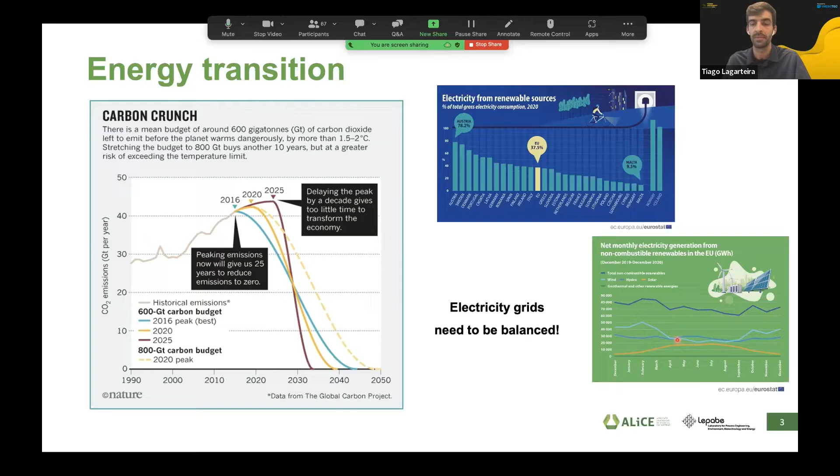To provide a stable electricity grid or to stabilize it, we need different storage solutions, not only in terms of response time, but also in terms of power and energy density. So this is a little bit of what I wanted to introduce here.

In terms of electrochemical energy storage, we have different types of solutions, from capacitors to supercapacitors, batteries, and fuel cells, which I'd say is more hydrogen. These different technologies have different specific power and specific energy. Energy is more related to capacity, while power is responsible for how much energy we can deliver per unit of time.

We can see that capacitors have very high specific power, and hydrogen has the lowest in this case. But in terms of capacity, hydrogen has the highest value, followed by batteries, supercapacitors, and then capacitors.

Also important, depending on the application we need these storage systems for, is the notion of energy density and power density, related to gravimetry—per unit of mass—and in this case per unit of volume. This is quite relevant mostly in mobile applications and transportation, because the space needed for these systems is much more limited. So we need to provide compact systems with relevant energy density and power density.

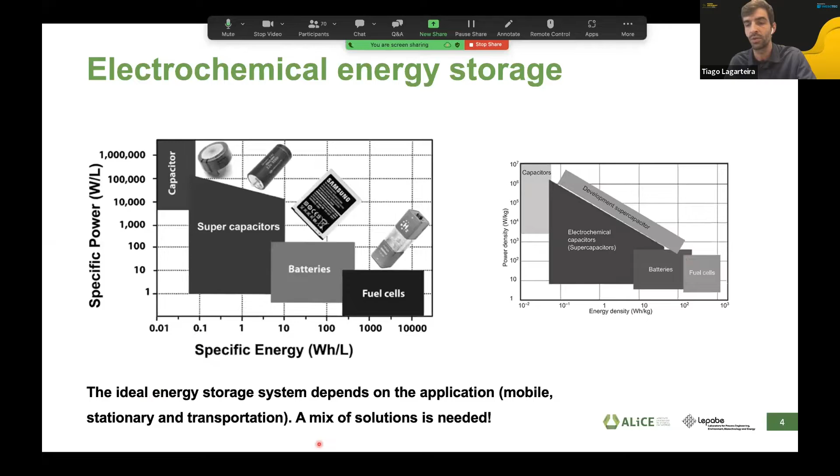From a gravimetric point of view, hydrogen has the highest capacity, followed by batteries. But in terms of power density, hydrogen has the lowest compared to capacitors, supercapacitors, and batteries. The main outcome of this chart is that the ideal energy storage system depends mainly on the application, and since different applications have different needs, a mix of solutions is needed. This is not about competing between electrochemical energy storage systems, but competing against the use of fossil fuels. So we will definitely need a mix of solutions that will be more advantageous depending on the application.

So now specifying a little bit the energy storage systems related to batteries. In this case, we have again a relationship between energy density and also specific energy, so capacity. And I would like to present you here the all vanadium flow batteries, in this case with very low energy density and also capacity. And we have here lithium ion.

So lithium ion is the most known battery technology that is being used mainly in mobile applications, but also in lightweight vehicles. But we also have some interesting batteries, some based on lithium and some other ones, redox flow batteries, that are a much more disruptive approach but less mature, at lower TRL, but that will deliver higher capacities and also higher power densities when compared to lithium ion.

So just for your reference, gasoline stays here. So this is a little bit our reference in terms of needs, or what we need to deliver with a completely different propulsion system.

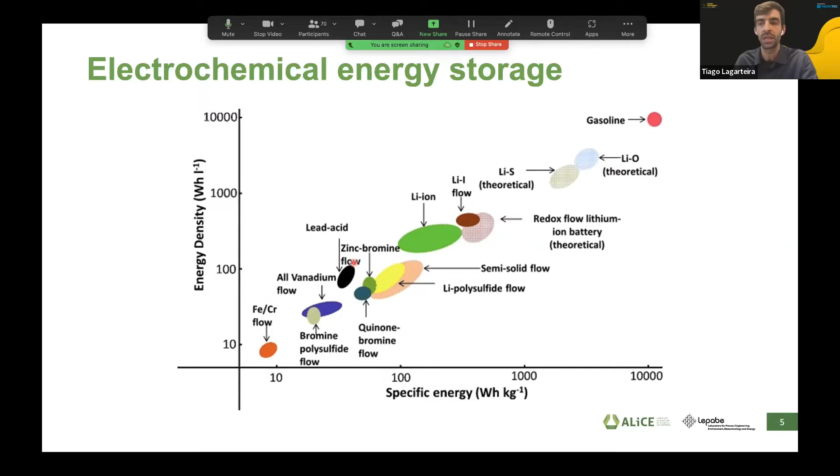So regarding redox flow batteries, redox flow batteries are a technology that is already in the literature since the 50s. They experienced a very slow pace of development. NASA was the first one developing these at the small stack level, but then most of the work was done by the group of Skyllas-Kazacos.

Skyllas-Kazacos is a professor. She is based in Australia. She is not so active today anymore, but her group were the main pusher on vanadium redox flow batteries.

Then in 2011, considering the awareness of the population towards electrification and decarbonization, the research interest on redox flow batteries started increasing. And today we have 9 different types of redox flow batteries that are already in the market. Okay, not very large scales, but they are already, and you can already see them on the market.

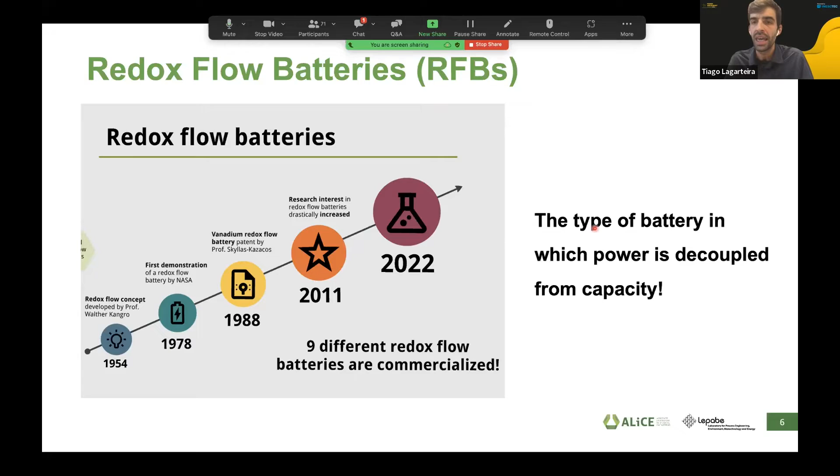However, why are redox flow batteries so interesting? Regardless of the low densities in terms of capacity and also power, in this battery the power is decoupled from capacity. So here you have a small sketch of a single cell of a redox flow battery.

And you can see here that the energy, unlike lithium-ion batteries, is not confined to a solid-state electrode in this case, but the energy is instead in an electrolyte. We call it an electrolyte. So what happens here is that we have the hardware, so the components of the cell, end plates, porous transport layers, and also a membrane that electrically insulates both electrodes and only allows the passage of ions.

But the energy itself, electricity, is stored in liquid electrolytes that we can flow inside the battery and that we can charge or discharge it depending on the operation mode by using very simple devices like pumps. Here we have a sketch of the components.

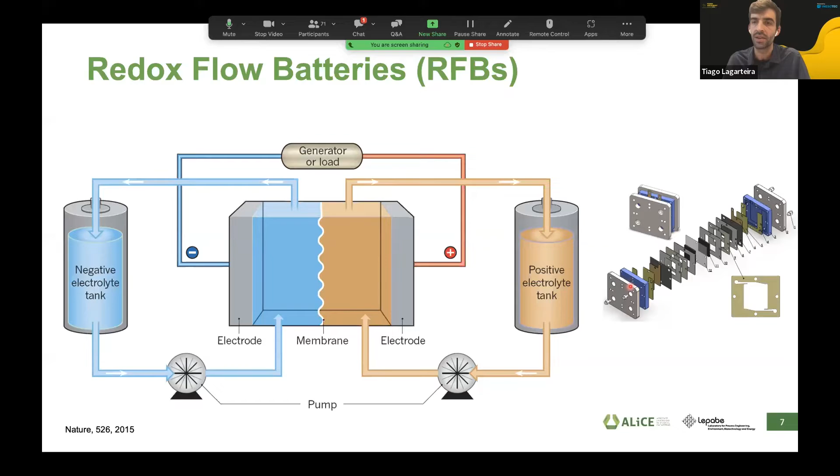This is, okay, the membrane inside. All the other components are gaskets to avoid leakages. And we have here these black ones. These are where the charge transfer takes place. So these are the electrodes, typically carbon felts. Then we have current collectors, graphite plates, to be able to circulate the flow and to have a more homogeneous distribution, and also the end plates where we tight the screws to provide compression.

Of course, in an industrial device, what you have is a stack of these cells, so we can stack them in series connection. And yes, so most of the components are very similar to what you see in single cell. We have the positive electrolyte working on the positive, circulating in the positive sides. We have ion exchange membranes, bipolar plates, and of course the end plates.

And what we have when we have a discharge cell is that we have an OCV of 1.25 volts. So of course, to be able to charge it, we need to provide electric power. When we are in discharge mode, the system realizes work for us, so we are able to transform chemical energy again into electricity.

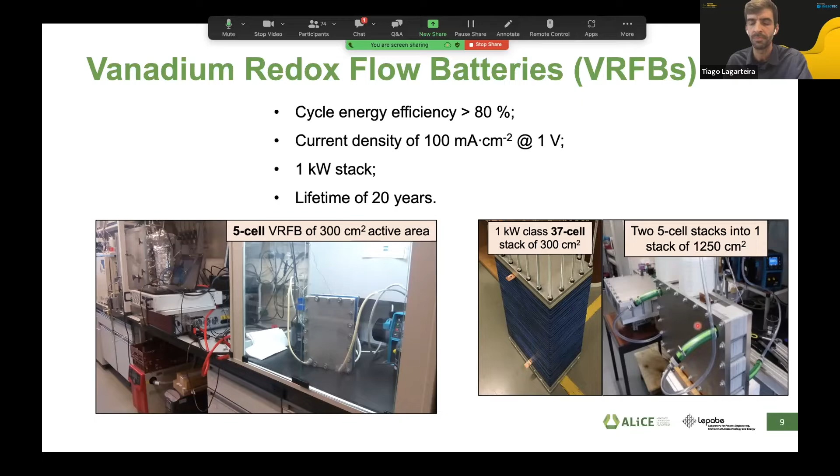This was a national project together with EFACEC that ended just before the pandemic, by the end of 2019. Now some of the advantages of these batteries.

They are very cheap to construct, with low levelized cost of energy. They can enable high current densities, very high round trip efficiencies, and they are very stable. Additionally, because we use aqueous-based electrolytes, they are safe and reliable.

However, they raise some environmental concerns. Sulfuric acid and vanadium aqueous solutions pose environmental concerns. Also, the low solubility of vanadium at higher temperatures is a problem because it decreases the power density of the system, and vanadium in general has a high price.

Vanadium is a critical material, but it is dissolved in very small concentrations in the sea, meaning very high OPEX to obtain it. That's why the cost of vanadium per kilowatt hour is excessive for the target set by the European Union for electricity storage. They also have a low energy density, around 25 watt-hours per liter.

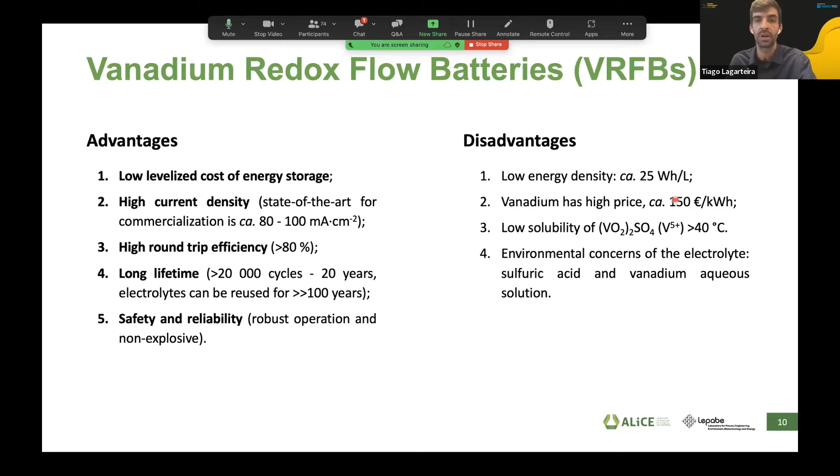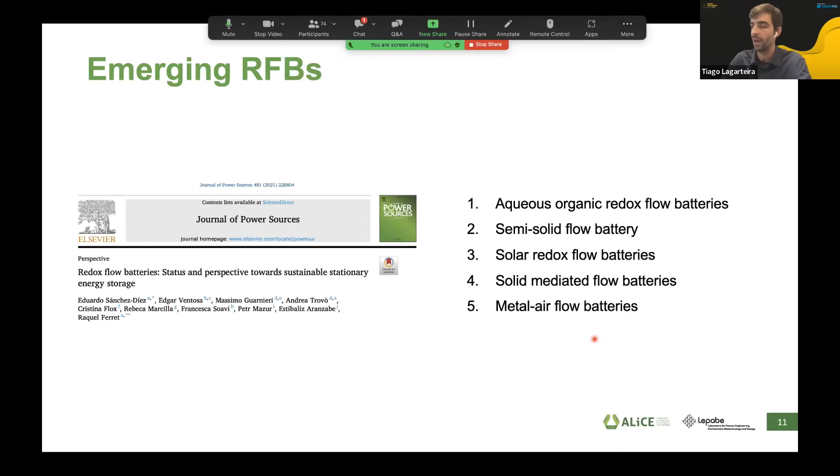I will mention some other emerging redox flow battery technologies: aqueous organic redox flow batteries, semi-solid flow batteries, solar redox flow batteries, solid mediated flow batteries, and metal air. I won't go into all of them, only the ones we are currently working on and that we think have more potential.

Aqueous organic redox flow batteries are quite interesting because as redox pairs we use organic molecules, which are very inexpensive to synthesize using very abundant materials. So they have very high potential in terms of cost for the system. The round trip efficiency gets closer to 85%, with also relevant current densities.

But our interest within our group is related to solar redox flow batteries. These are a hot topic right now because we can include in one device the capture of sunlight to produce electricity, and in the same device we are able to produce solar fuels without the need for independent photovoltaic panels to power electrochemical systems.

We can integrate these into one device, and also do very interesting thermal management because we can take advantage of the heat from radiation, not only to heat up the system, but also to integrate it with, for example, residential applications such as heating water. However, these solar redox flow cells are not commercialized yet.

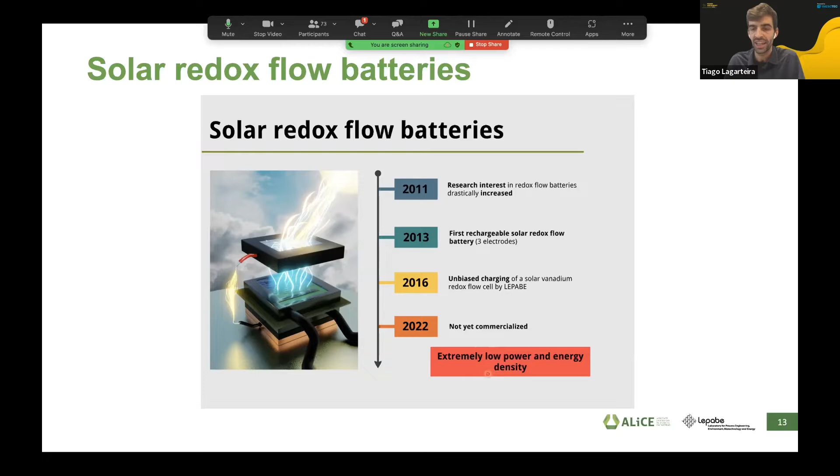They have extremely low power and energy densities right now. However, our group was one of the main groups in Europe that brought the spark back to this technology. The first work on this was done in the 70s, but together with Aarhus University in Denmark, we filed a patent on this concept in 2015, because we noticed some very innovative redox pairs were emerging, along with higher performance photoelectrodes that would be able to ramp up this type of technology again.

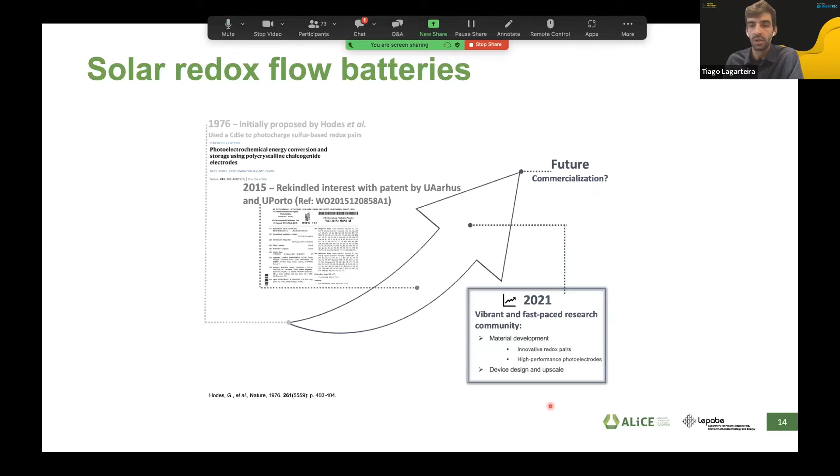In our group, we are mainly working on the device designs and trying to upscale these to relevant scales, aiming for a solution that can penetrate the market and present the theoretical advantages we see. So just a short scheme about this type of system.

We have a photoelectrode here, in this case a photoanode, where we have charge generation. Then we use a redox mediator to collect the charge and deliver it into our electric load, and also to produce ions that are exchanged through the ion conducting phase, to be combined with the redox species in the other electrode.

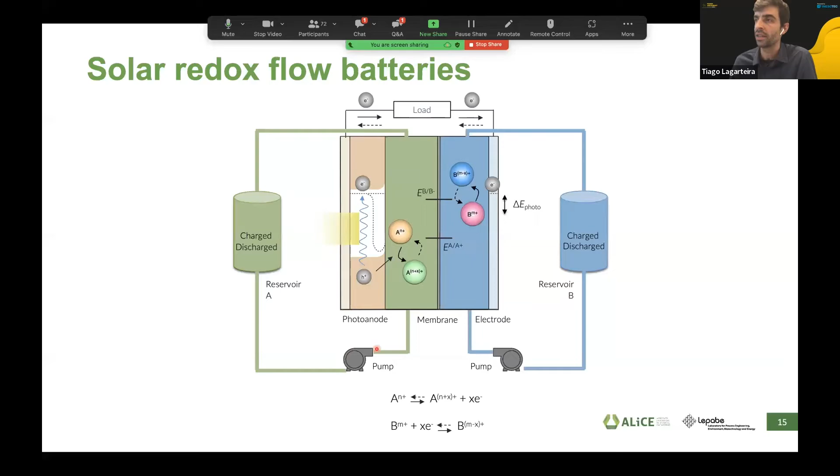We have also been working on photocathodes. However, photoanodes, considering the electrode potentials, are more interesting in terms of performance right now. So this is a little bit of what we have been doing in our group.

From 2015, there was no continuous operation of this type of system, and the active area was also very, very small. So we carried out a project together with a university in Denmark, where we constructed devices able to have continuous operation. Active area was still an issue, and this is currently our focus - to upscale the active area from a couple of square centimeters to 25, and hopefully larger areas in the future, so we can reach scales that are industrially relevant.

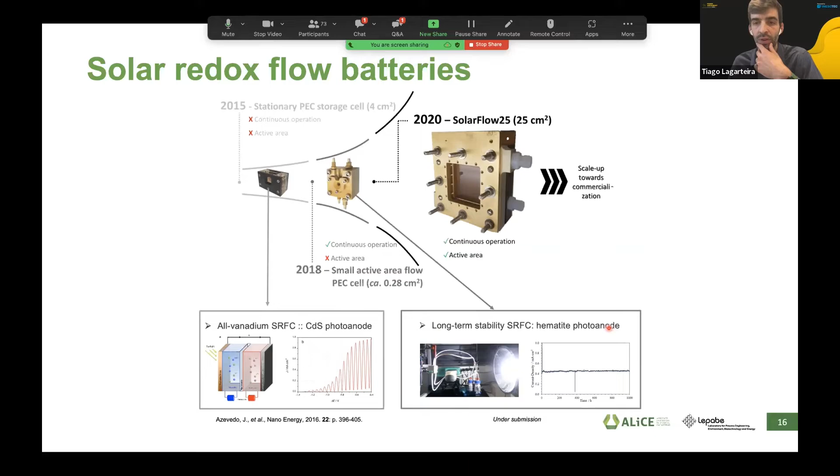We have also published some very important works in the literature - the first all-vanadium solar redox flow cell with a cadmium sulfide photoanode, and now we are working on a hematite photoanode, which shows very stable performance.

But also, as an alternative, not talking again about solar redox flow cells - these are a very hot topic right now - in our group we have a close collaboration with a company based in Munich on POM redox flow cells. These are very similar to the vanadium ones, but instead of storing energy in vanadium ions, we store it in POMs.

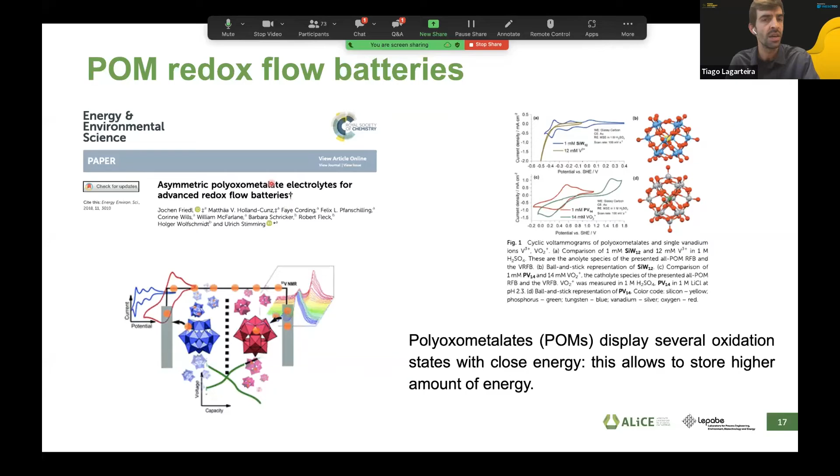POMs are a molecule, a metal complex called polyoxometalates, that display several oxidation states. This means that per molecule we can exchange, in some cases, up to 32 electrons. So we can store much more energy in these redox species compared to vanadium, which dramatically increases the energy density and also the power density, because electron transfer with these redox species is very, very fast.

Another type, more conceptual because different variants are already being studied, is the metal-air flow battery. Metal-air means we have an electrode that is metal, but the other side of the battery is much more like a fuel cell. So we can, for example, using vanadium, aluminum, nickel, or also these POMs, use these POMs on one side of the battery.

On the other side - for example, for transport applications this is very relevant - we can process oxygen from air and discharge the electrolyte inside this battery. Then, due to the decoupling of power and capacity - this is why redox flow batteries are so interesting - we can go to the station and just switch discharged electrolyte for charged electrolyte, in a reverse reaction, also on the air side.

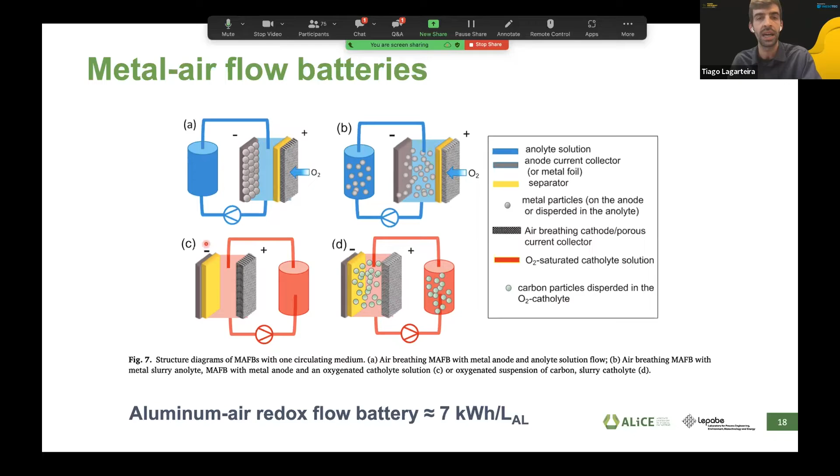And now I will briefly mention what we are doing on hydrogen. Hydrogen, for a lot of people, companies, and institutions, is considered the fuel of the future, and hydrogen is already being used today as a utility, mainly in petrochemistry, ammonia production, and steel. But hydrogen is also seen as a very promising energy vector.

Hydrogen systems are much less efficient than batteries on average, if we talk about electricity-to-chemicals and back-to-electricity conversion. But hydrogen is much more flexible than, for example, lithium-ion batteries, because storing electricity in batteries is very promising in modern electrical grids and modern countries.

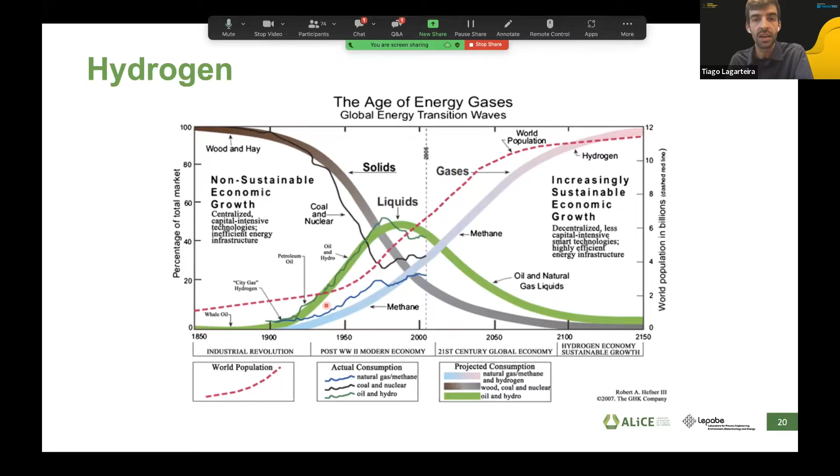But if we talk about electrifying or decarbonizing countries like China, India, or mainly in Africa and South America, the electricity grids cannot be so easily balanced with batteries. So in this case, hydrogen is a commodity that can be easily transported over very long distances, and despite the low efficiency, its flexibility is a critical advantage, and it can replace natural gas in the future, which is a commodity currently being commercialized on a global scale.

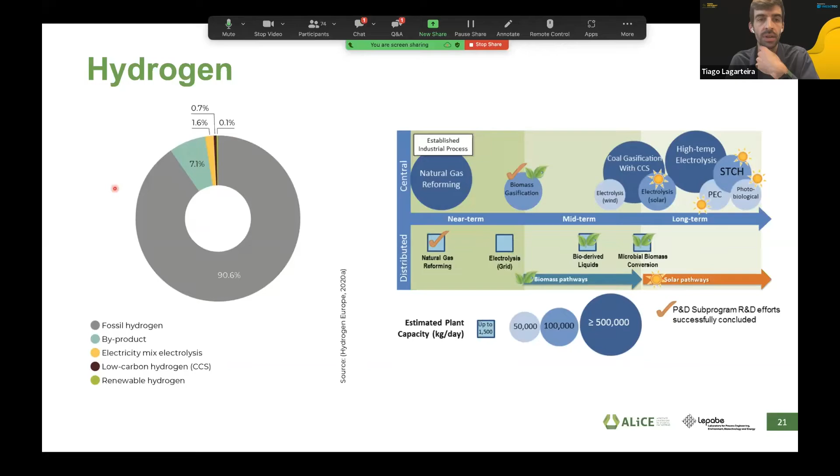So most of the hydrogen production today is based on the reforming of fossil fuels. In the future, we expect that water electrolysis will take a major share of hydrogen production, so the so-called green hydrogen. And within this green hydrogen, we have different technologies to be able to produce it.

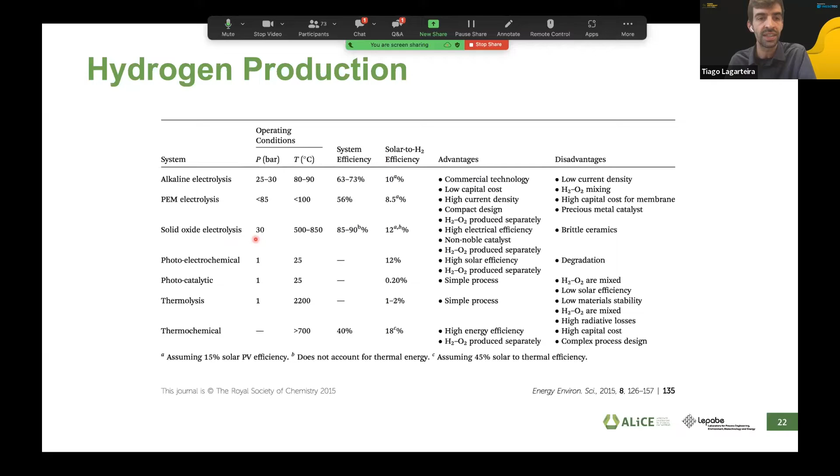So we have alkaline electrolyzers, proton exchange membrane electrolyzers at low temperature. These are the more mature technologies, but we also have electrolyzers that operate at higher temperatures, in which the thermal integration is very interesting because we can use less electricity to produce the same amount of hydrogen. However, I will skip this.

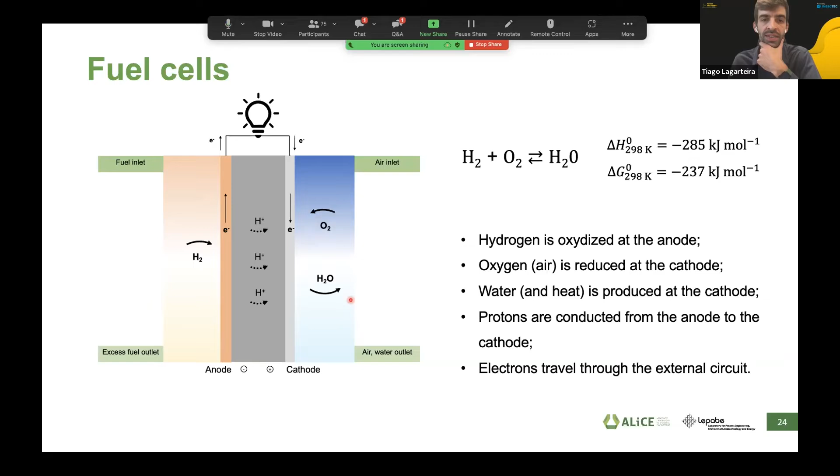A fuel cell, I think most of you know, is a galvanic device where we have our fuel, hydrogen, and we oxidize hydrogen, we produce protons, and the electrons flow through an external circuit and are able to produce electricity. In the cathode side, we process oxygen, and the only product is water and some heat.

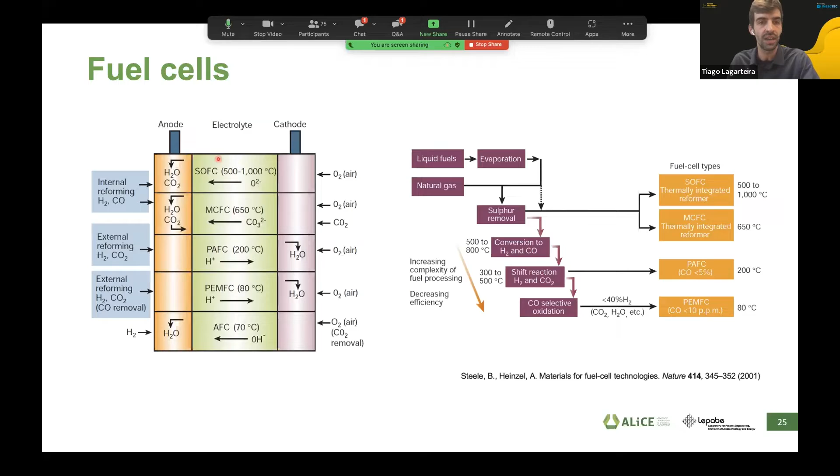So we have also different types of fuel cells. The type of fuel cell is mainly dependent on the type of electrolyte that we use, but this impacts directly on the operating temperature. So we have fuel cells that run at low temperature, again alkaline fuel cells, PEM fuel cells, and also phosphoric acid at intermediate temperatures. And we have also solid oxide fuel cells that work at temperatures above 700 degrees C. So this impacts on the type of application where they have the biggest advantage.

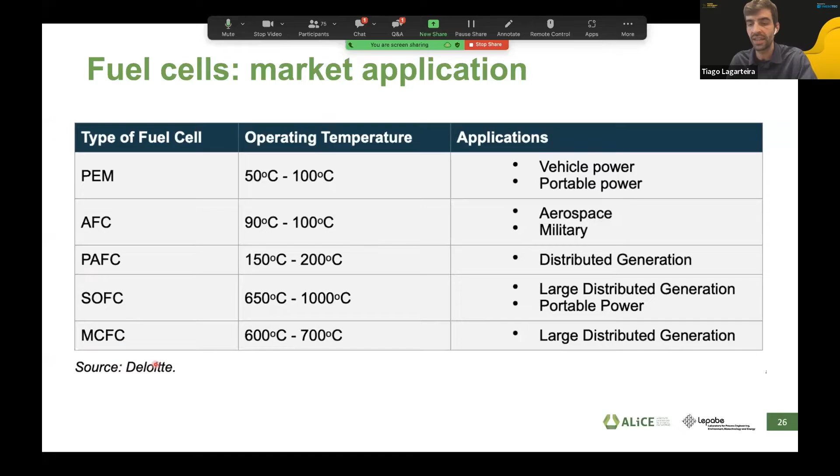Typically, low temperature fuel cells are more for transportation and portable power. Here, again, they are already being used in military applications where the decentralized and remote location is a very important requirement. But also these high temperature fuel cells will also have big application in terms of centralized electricity production.

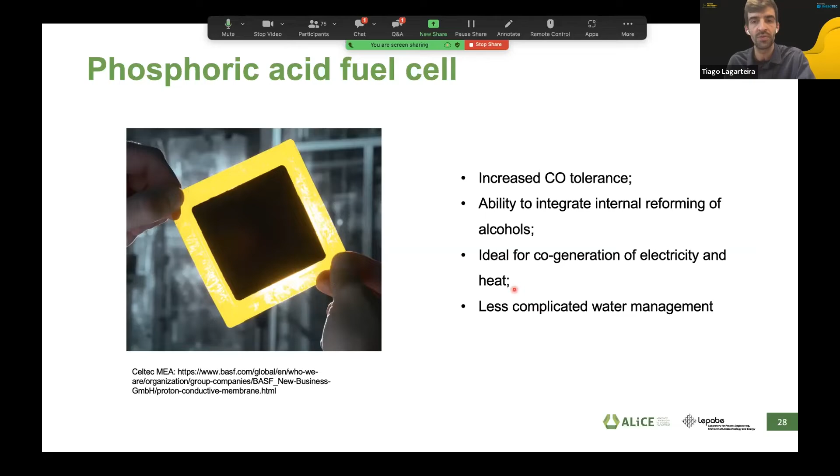So these are some of the works that we have been doing. We produce some components for fuel cells. And here I was about to talk a little bit about one of our most disruptive works on this field, but I think I'm reaching already my time limit, so I will skip this.

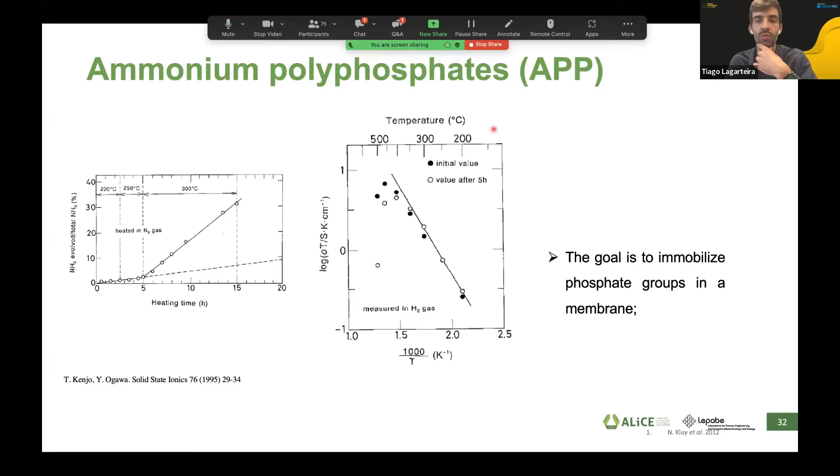Just to mention that we are trying to come up with a new membrane that will allow us to fill a gap where no electrolyzer or fuel cell exists, which is between 300 and 400 degrees C. So typically low temperature fuel cells work under 200 degrees C, high temperature ones work at least at 600. So there is here a gap that we are trying to fill, and we are trying to come up with new membranes for this.

And why is this important? Because most of the hydrogen that is consumed today is from the Haber-Bosch process, the production of ammonia, which is an exothermic process that requires large amounts of hydrogen. So here we have an industrial cluster in Portugal, and they would be willing to tomorrow get some hydrogen that is zero emission. If we are able to come up with an electrolyzer to produce green hydrogen operating in the range of temperatures of the Haber-Bosch process, we can directly make heat integration, which is quite relevant in terms of industrial processes. This is a new class of electrolyzers that we are also studying.

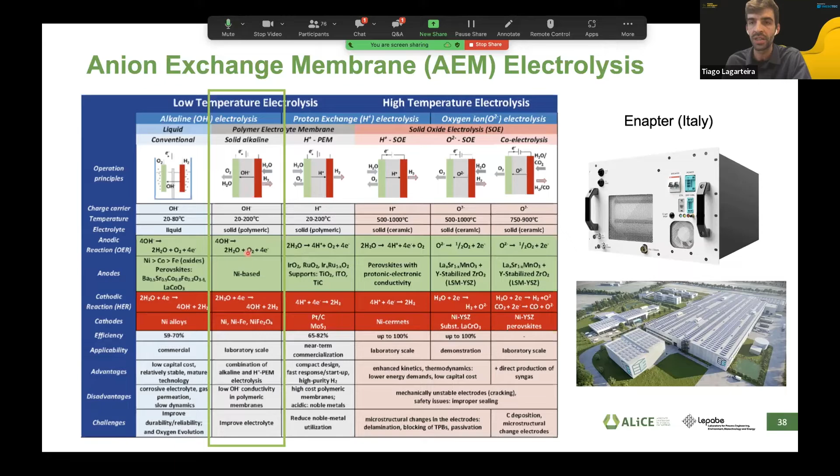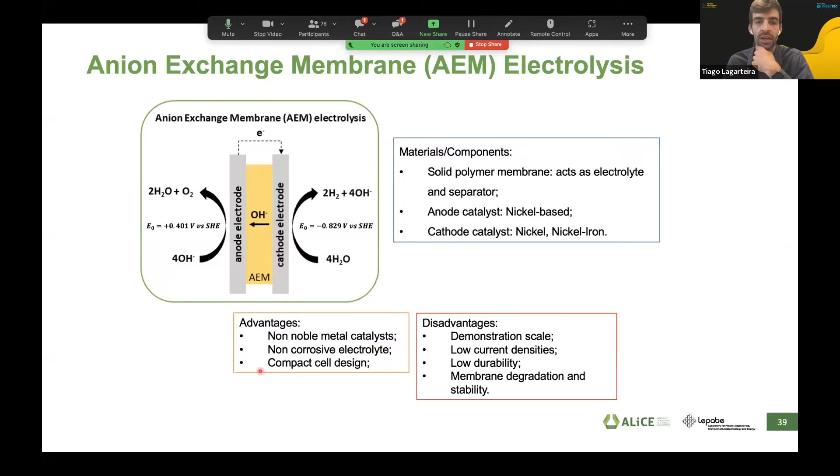So these are anion exchange membrane electrolyzers. These are alkaline, but much more compact, like the acid counterparts. Typically the alkaline ones are less compact devices. So we are also making R&D. Only one company is developing this in Europe, which is Enapter from Italy. Their advantages are that they do not use noble metals as catalysts, non-corrosive electrolytes, and their compact design. However, the level of maturity is still too low.

Tiago, thank you very much for a very interesting presentation of the different technologies, bringing us a new vision to the people that usually consider the battery as something that charges and discharges and does not look too much at the details and the characteristics of these systems. But as Ricardo will show us, it is really important to look at that and have in consideration the specific characteristics of these devices. I believe in the end, we need this diversification of technologies to really enable the integration of energy storage in the system.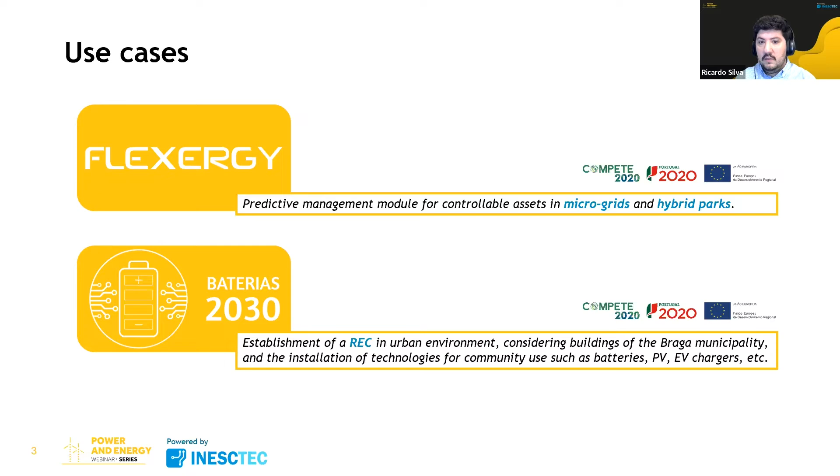I will be focusing on two use cases where we have been implementing optimization. One is a project that already ended last year, Flexergy, which aimed to develop a predictive management algorithm for microgrids and hybrid parks. The other is Baterias, which we've already mentioned today, an ongoing project aimed at establishing a renewable energy community in urban environments.

Starting with Flexergy, here we consider that we have one promoter, and that promoter is responsible for a certain type of system, which is either a hybrid park or a microgrid. He has in that system lots of technologies that can be controlled, with the main focus on the batteries. We have come up with several optimization objectives that I will talk about further.

Another feature we wanted is that the energy management should be applicable to different time frames. So we can do energy management for planning—either day ahead, or one year ahead for what is going to happen in the next year—or in the operational time frame. This is not real-time operation, but it's about what the set points are for the batteries and for the curtailable loads in the next 5 or 15 minutes.

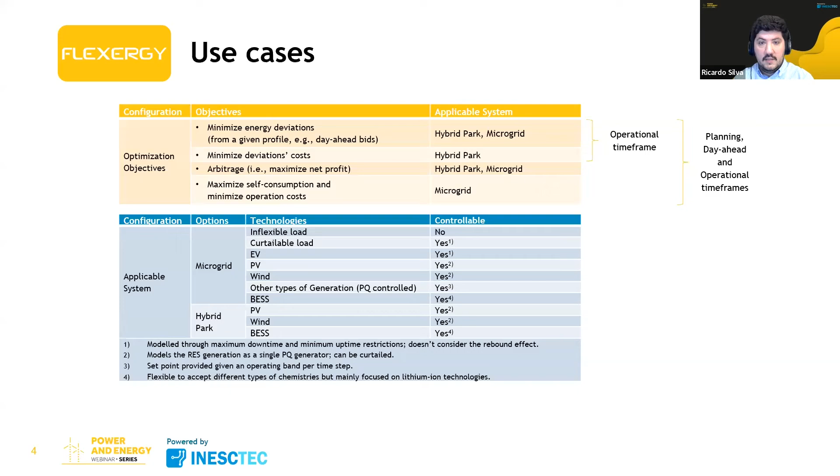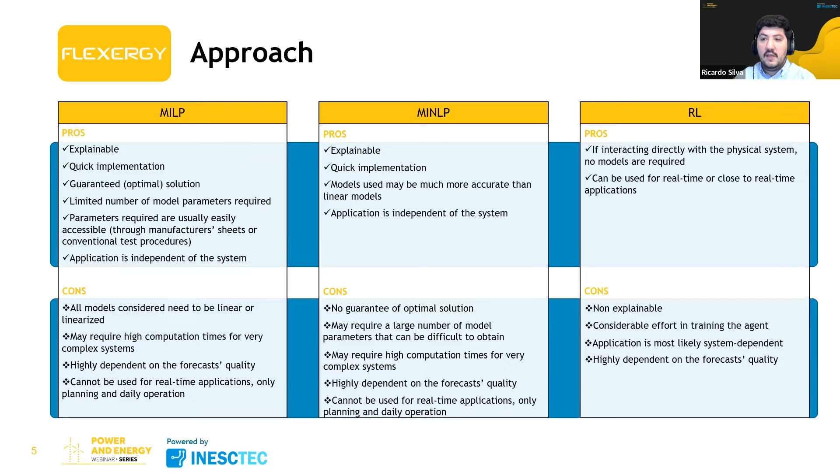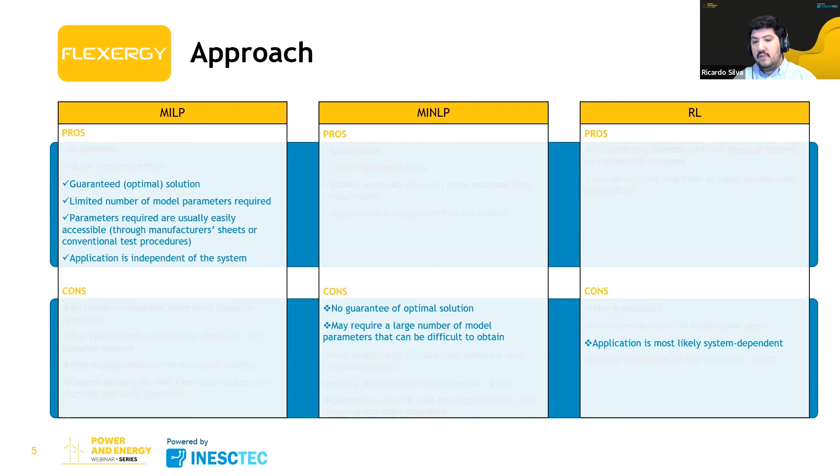In the beginning, we had to consider different approaches. This is a list of the pros and cons we found for each one: mixed integer linear programming, nonlinear programming, and reinforcement learning agents. I'd like to focus on the pros and cons shown here, because they support why we chose linear programming for our approach. With linear programming, you have a guaranteed solution that is almost always the optimal solution because of the linearity of the equations. You have a limited number of model parameters, and those parameters can be easily obtained either through manufacturers' sheets, for example of the batteries, or through conventional test procedures. Its application is independent of the system—you can use it in microgrids or hybrid parks, with more or less battery assets or load assets. It's very flexible.

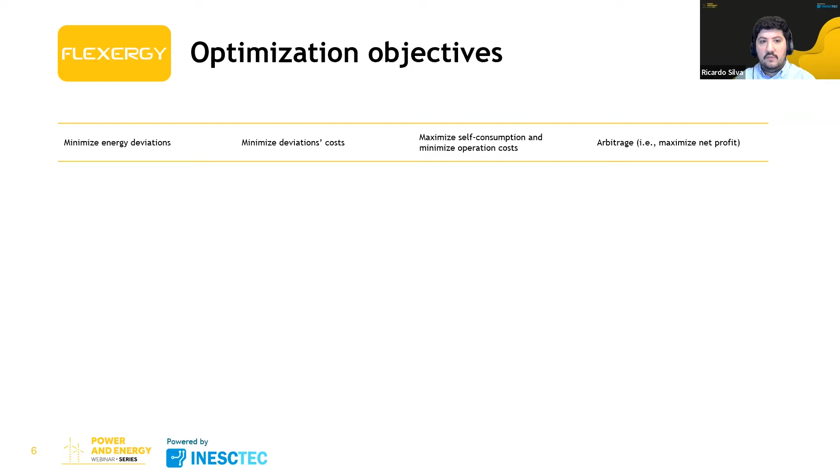Looking at the objectives we defined for this use case, we started by defining the objective to minimize energy deviations. This has meaning when you think about forecasts. If you're providing a day-ahead schedule, you base it on the forecast for the next day, which has an error. When you're closer to delivery time, you have better forecasts, and you know what error you committed the previous day.

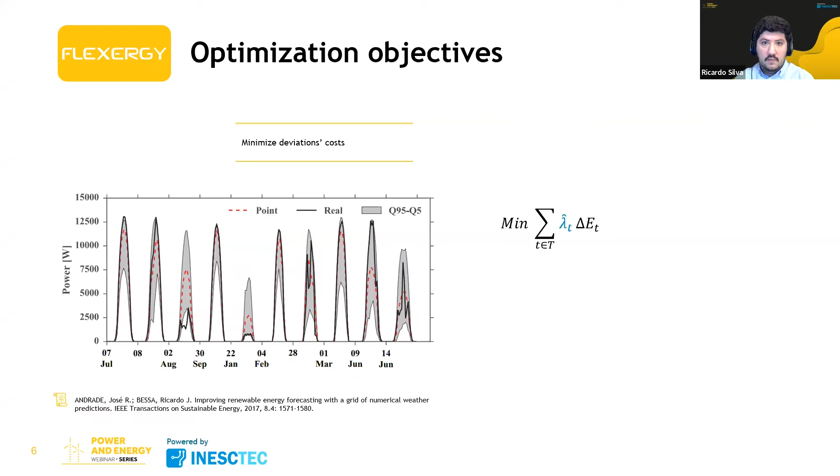So to minimize the deviations between what you offered in a day-ahead bid and the offer you're now going to provide, you can use the objective of minimizing that deviation through the usage of flexible assets such as batteries. You can also give a weight to the deviations across the day—for example, for certain periods of time, a deviation can be more costly than in other periods. This can be a weight, or a cost if it exists, a financial cost.

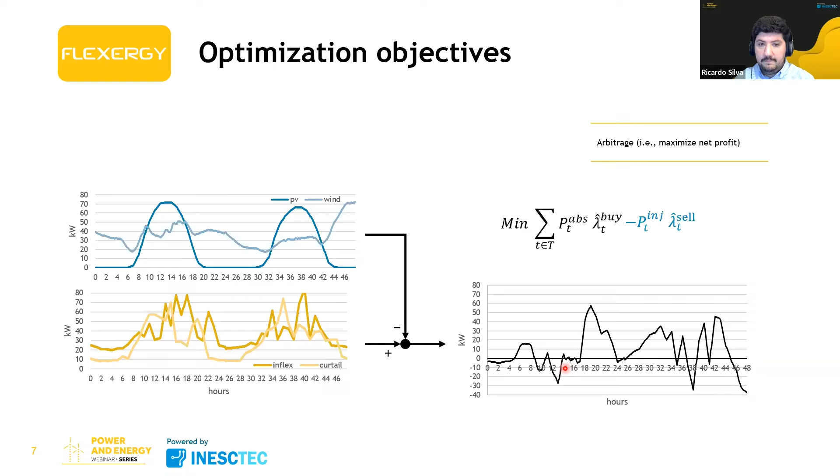Arbitrage is just considering that you also can gain a profit from this by injecting in the grid. Now, I won't be getting into much detail for most of the assets that we modeled, just a quick overview that we could give set points for generation curtailment if it was needed. For example, if you have some constraints in the interconnection with the grid and you need to curtail your generation, we could provide that. We could also provide curtailment set points for curtailable loads.

Here we considered that the loads did not have a rebound effect. They were fully cut. It was an on-off set point, but it followed some constraints. It had a maximum downtime and a minimum uptime constraint, which said if I cut now my load, it can only remain cut for a certain period of time at maximum. And when it goes back up again, it needs to stay on for a certain amount of time also, and that is configurable. We also provide set points for conventional generation for microgrids, but these are based on a band, so we were provided with an operational band and we provide a set point within that band, which could be 0.

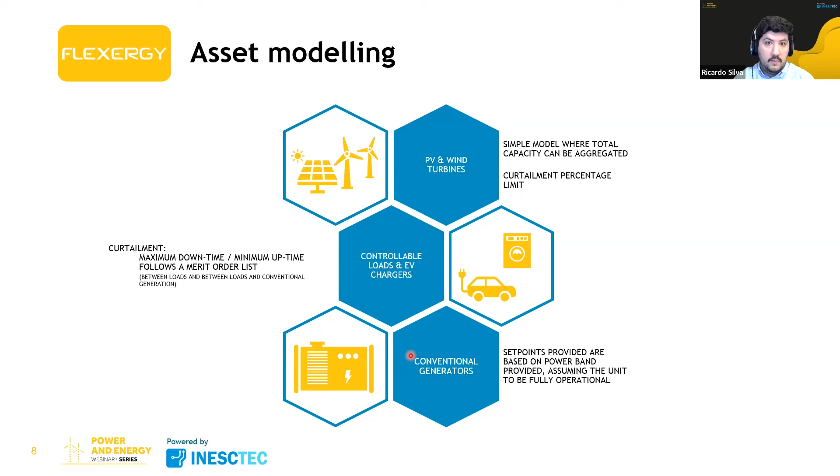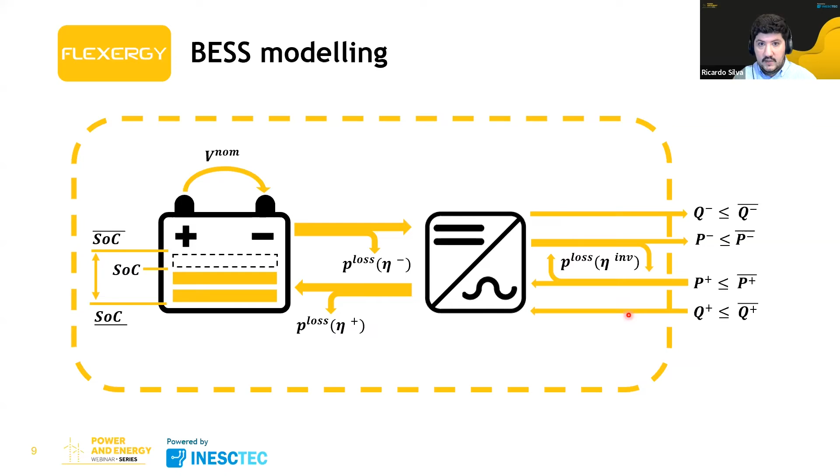So the aim of our work in this project in Flexergy was to come up with a model that could be tractable and yet linear. It could be described by analytical and explicit expressions. It was easily calibrated, and it's dependent on power, as opposed to models based on voltages and currents. This is because within the battery, voltages and currents can have different values inside the battery itself, but their product, taking out the losses, is always constant. So we wanted to provide power set points.

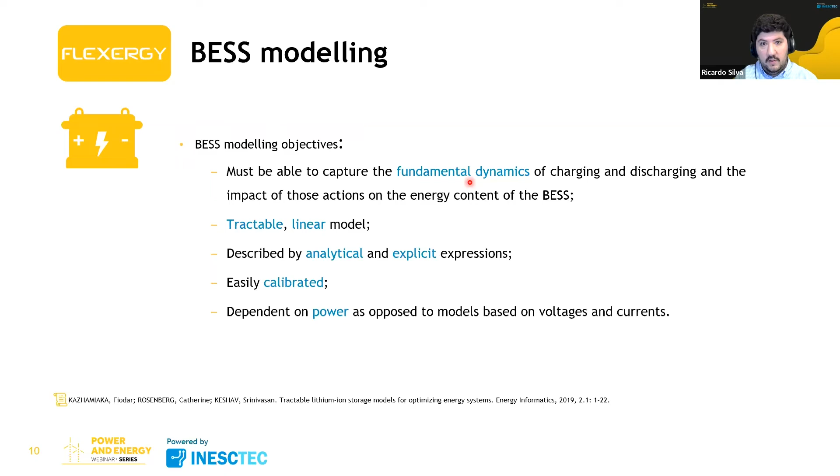Now, all these four objectives here are met by the bucket model. But the first objective, that must be able to capture the fundamental dynamics of charging and discharging and the impact of those actions on the energy content of the BESS, these are not met by the bucket model, or at least it's not a very accurate model. So we wanted to develop another one that would be more accurate.

Now, to do so, many of the most complex but more accurate models are the chemical models of the batteries that take into account how energy content is degraded over time because of the formation of some layers in the electrodes. And all of that is not compatible with linear programming.

But if we take some considerations about the lithium-ion battery, namely, for example, when the battery is at rest, the voltage is a good indication of the energy content. And when we say at rest, because we are considering an optimization step of 5 to 15 minutes, this is valid. This condition here is only for sub-second events that take place in the battery. So this is valid. Voltage is a good indication of the energy content.

And when charging and discharging the battery, the voltage undergoes a jump drop proportional to the charging discharging current, as you can see here. What does this mean? That the higher the current that you are charging or discharging your battery, the energy content available shrinks. You can charge less with higher currents and you can discharge less with higher discharge currents.

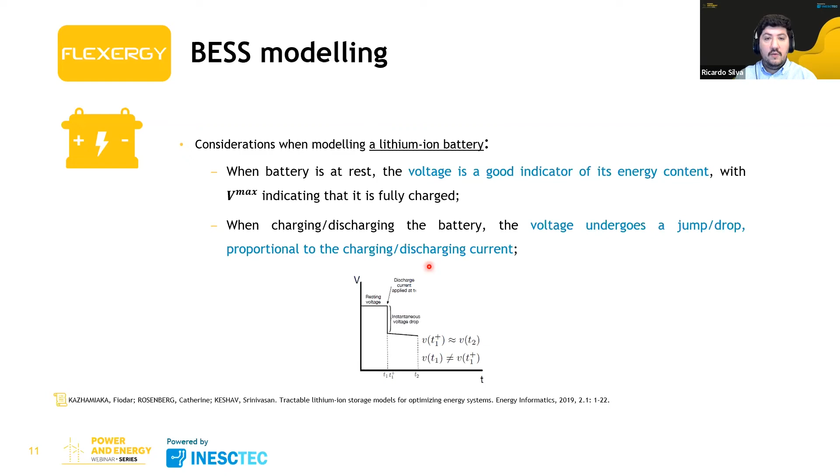Now, these are some of the simplifications that the model considers. I will not go through the math here, but the interesting part is that many variables are dependent, like the voltage for charging and discharging, which depend on other variables like the energy content and the current. But we wanted to model those either as parameters, constants, or as a linear approach to those variables.

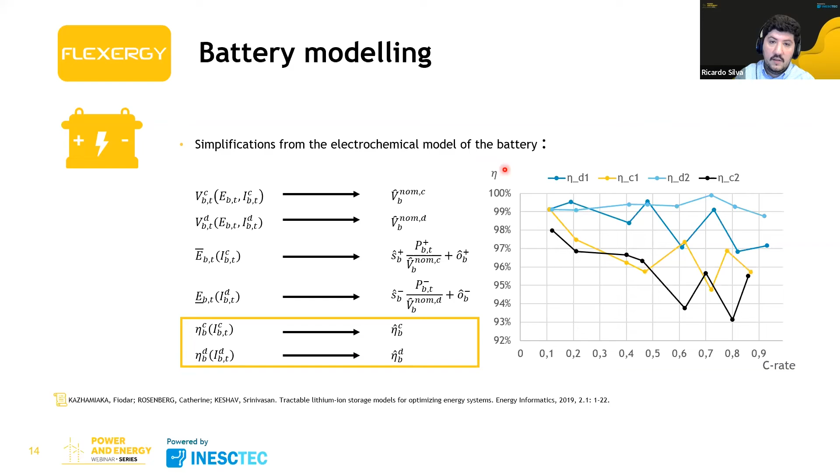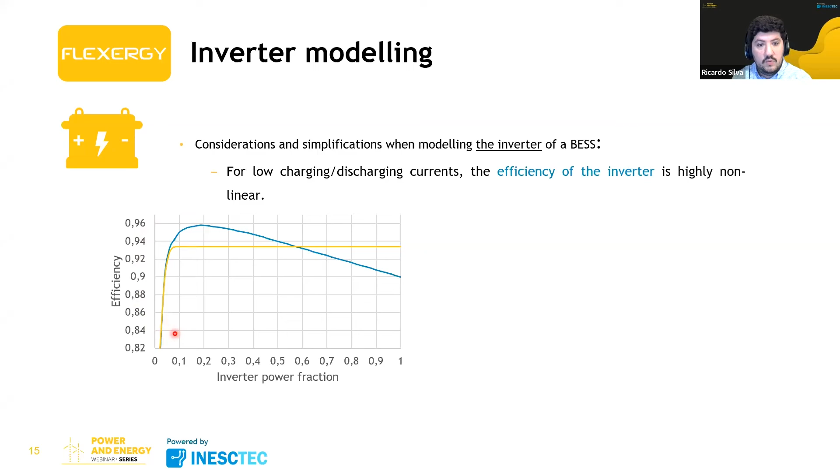Very similar things can be applied when considering the efficiency of the battery. This is very important because we can consider a constant efficiency for the battery itself, but not for the inverter. The inverter is highly non-linear in the first half if you use smaller power fractions. So we wanted to come up with an approximation, at least for the first part, that was not constant. So we did a linearization of this part of the curve.

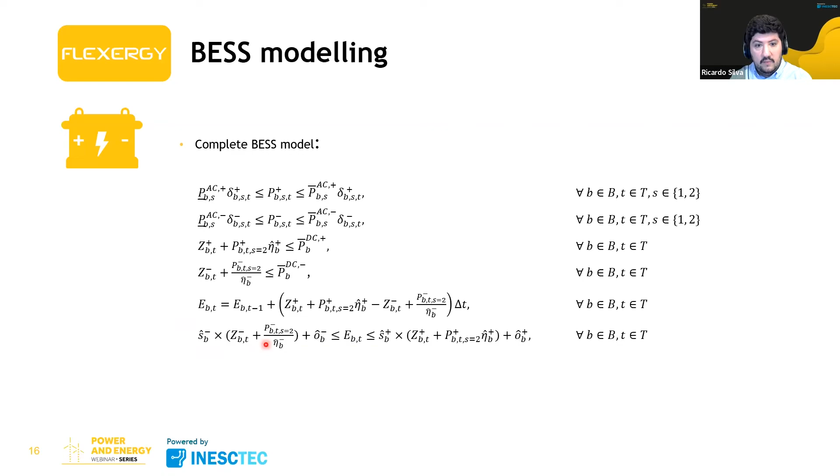Now, this is the complete BESS model with all these considerations. But you can see that it has the same points that the bucket model has, which are the limits for power charging and discharging, the update to the energy content, and the limits for the energy content itself. But now they are dynamic.

Naturally, it is a decreasing number, so the more depth of discharge, the fewer cycles you can have. We talk about depth of discharge because here we consider that along the life cycle of a battery, what you charge is also what you discharge. So here, you are not considering that the battery only degrades when it discharges, but you are aggregating the degradation from both charging and discharging.

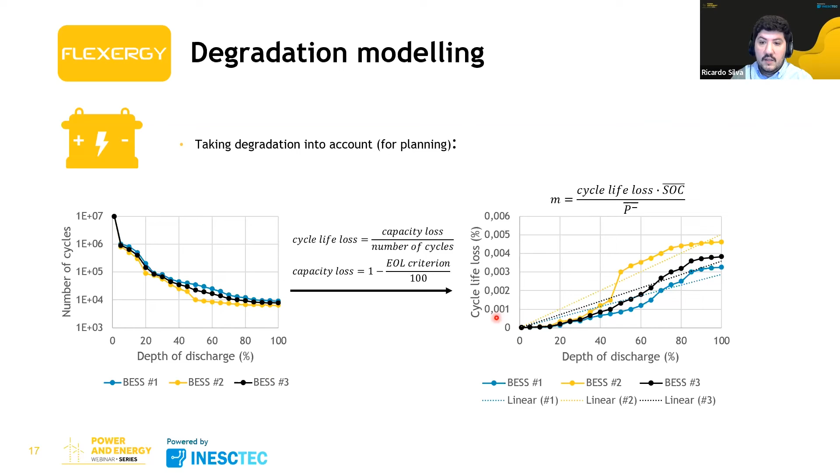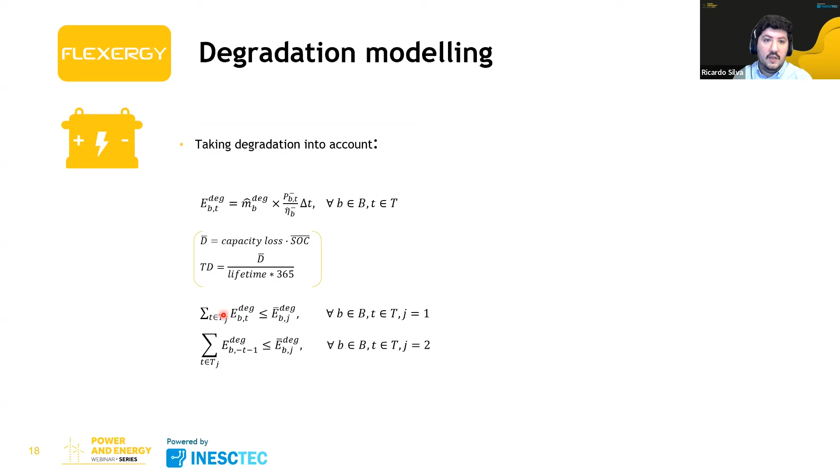So we do some transformations, and in the end, what we come up with is a line that tells us how much energy is degraded at each discharge event. We need another hyperparameter for our linear programming algorithm, where you say you want a certain lifetime for the battery, let's say 10 years. We input that, we know the maximum daily degradation, and we impose that as a restriction in our problem. So the battery can only degrade a certain amount per day, which limits the number of charges and discharges.

We also were able to define reactive power set points. There's a relationship between active power and reactive power that is not linear, represented by the PQ circle. What we do is segment that circle and approximate it by a series of piecewise linear approximations. Through other restraints, we can also impose reactive power set points, if for some reason, or for some times of day as is the case for hybrid parks, you have to comply with a certain tangent of phi at certain times of the day.

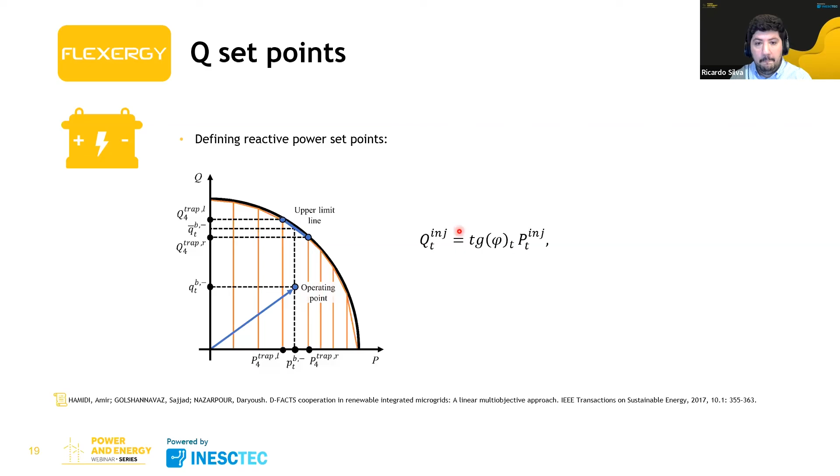Now I'm going to present some simulation results that we performed. Our tool was implemented in Python, using a very interesting dependency called pulp, which acts as an interface between Python and the solvers, where you can define your objective functions, constraints, and models of your assets. Pulp comes with a very good default solver, the COIN-OR branch and cut, which isn't as good as Gurobi or Cplex, for those who know what I'm talking about, but it's very good and it's open source.

For the simulations and for operationalization, when scheduling set points for the next 5 to 15 minutes, it's always good to use an MPC framework. We have a sliding window, and when defining the set points for the next 15 minutes, we optimize for the next 24 hours but only keep the first step, and impose that. After 15 minutes we do another optimization for the next 24 hours, and so on. This is because you can always have newer and more accurate forecasts along the day, and you can substitute the first time step of forecasts with measurements, which reduces the error you're committing.

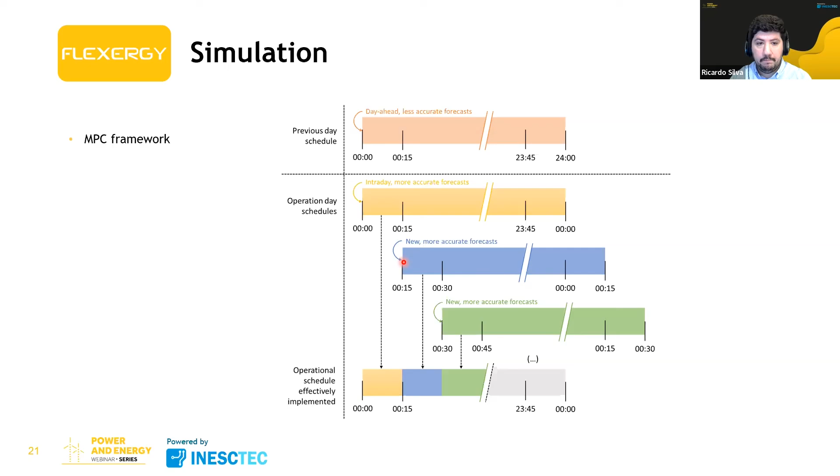In the magnifying glass, I'm showing the effect that considering dynamic SOC limits, dynamic energy content limits, has on the battery. You can see that for a higher charge current, this dashed green line shows the energy content was reduced. This is a very small reduction, or it seems so, and you might ask if that has an influence on the strategy. We performed simulations and found that yes, it does have an impact, though not very great. You can see the full bars along with the empty dash bars are pretty much overlapped, but there's a difference because of those dynamic SOC limits.

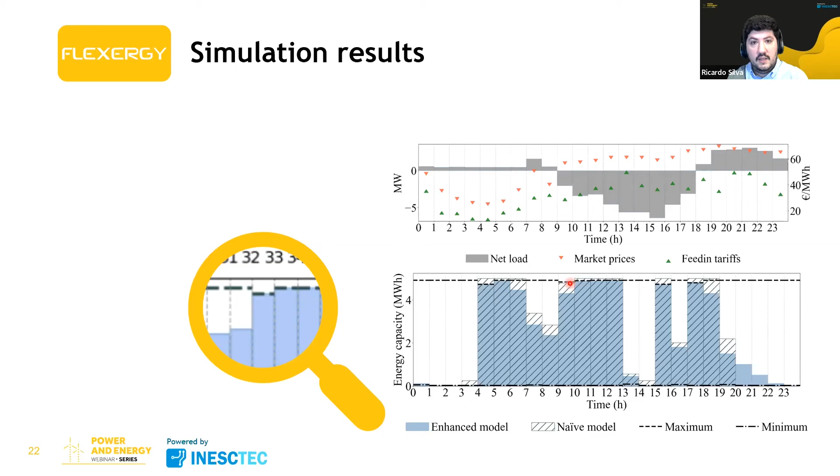Now this is another example, but using conventional generation instead of load curtailment. You can see these blue bars that come up here, showing that you start to use the generation. The prices are also always higher.

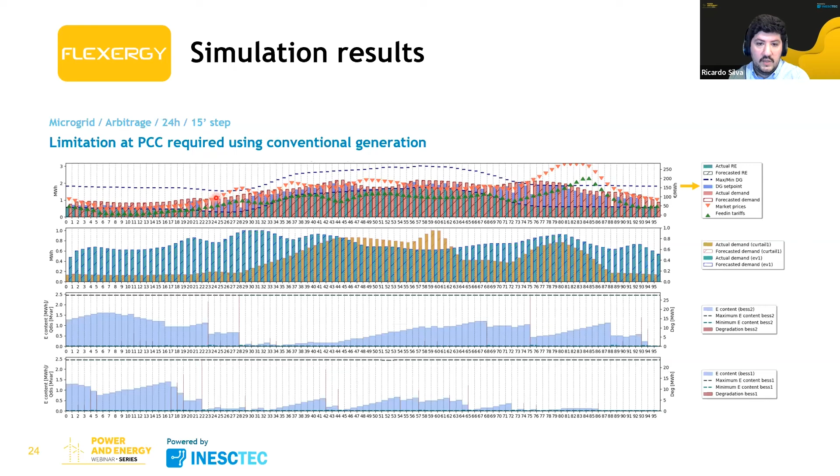This is an example for a hybrid park. Here what we wanted was compliance with a day-ahead schedule. In the end, this day was very good because it had zero total deviation. We are also highlighting the set points of reactive power.

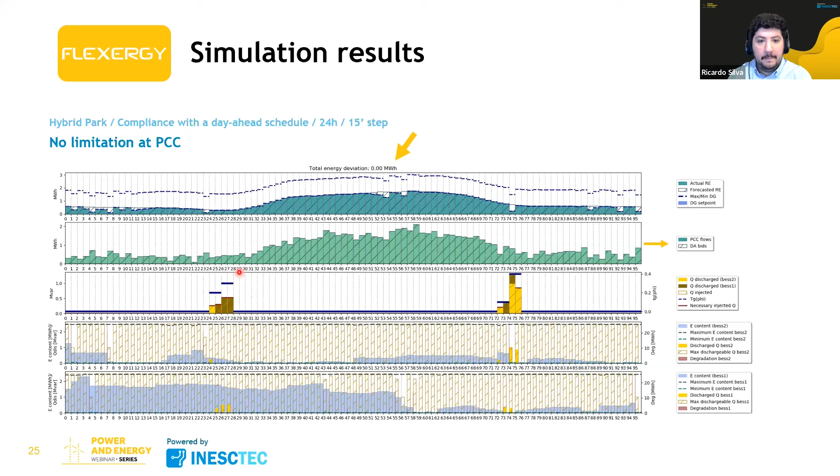Now this may be more interesting. We performed the simulation for a microgrid over a year, and we wanted to see what was the impact of considering degradation, that daily limit to the degradation, on the objective function value. In this case, we are performing arbitrage, and on the degradation.

For minimization of energy deviations, the difference was not very big, because we did introduce a difference between theirs and our forecasts that was in par with the state-of-the-art literature, and the usage of the battery is not so intensive. So the values obtained for the objective function and the degradation are very similar.

But when you consider another objective function that is more intensive for battery usage, like arbitrage, you see a difference. What is that difference? When you use an unconstrained strategy where you do not consider a limit for daily degradation, the objective function value was better by 27%. So here it is negative because it was a profit. But on the other hand, degradation increased by 19%.

So there is a huge impact on the strategy, and a huge impact on our objective function value and the degradation. So for long-term analysis, you need to consider that hyperparameter that is the lifetime, which we consider 10 years. You need to adapt it to your needs.

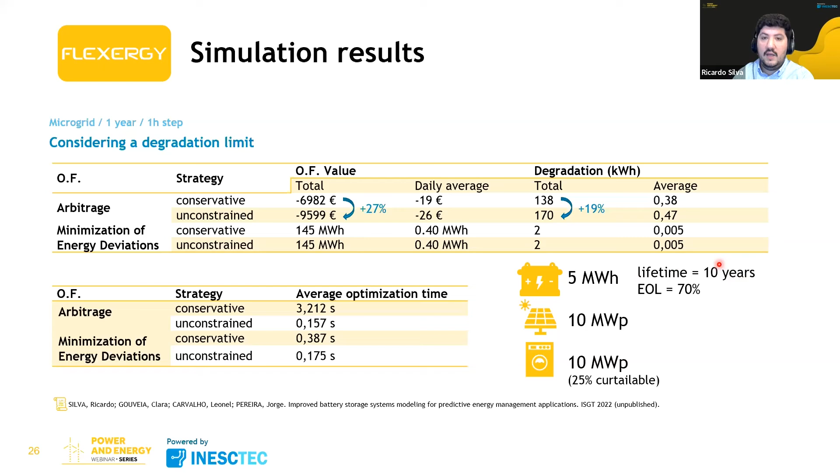As for the computational burden, I only want to highlight here that we performed several cases where we use different optimization horizons, different granularity of our data. And for each one of them, even for the most complex, where we had to optimize 288 time steps, they were always below the minimum granularity that we are considering for operational optimization of energy management, which is 5 minutes, which is 300 seconds. So here we see that in the worst case, we only took 110 seconds.

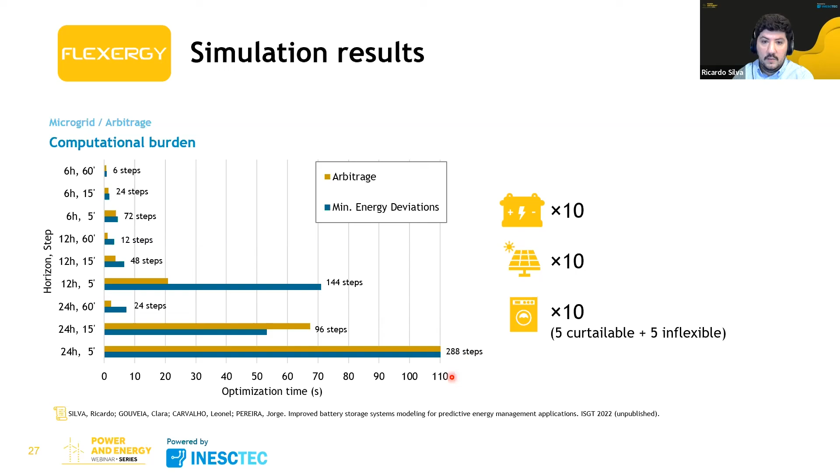So our tool was able to be used for operation.

Now, this tool was implemented live. It was showcased in a live testing in the Democrat testbed of EFACEC, where they had these assets. It was integrated in the software that they've developed called ES Manager, which includes a human-machine interface, some forecasting models, and of course our tool, which was provided as an API.

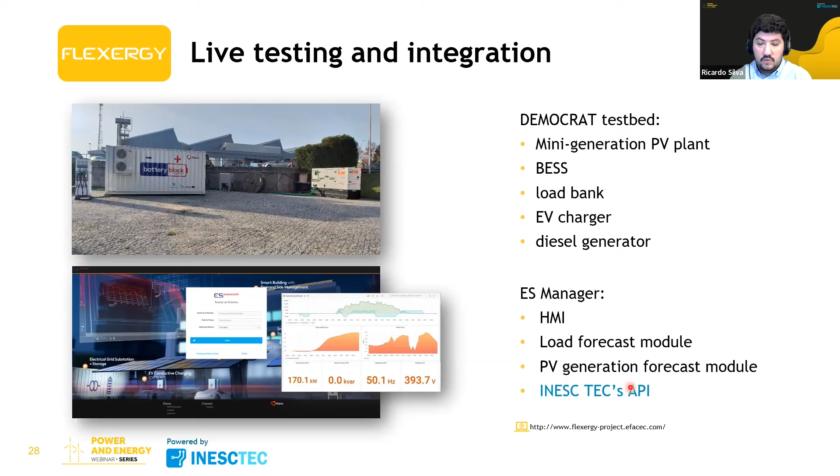Now, very quickly, I'd like to talk also about Baterias 2030, which aims to implement an energy community. In this case, the main difference is that we have several promoters, and each one of them has their own interest in mind. But a certain degree of orchestration is nonetheless needed so that all can benefit as a whole.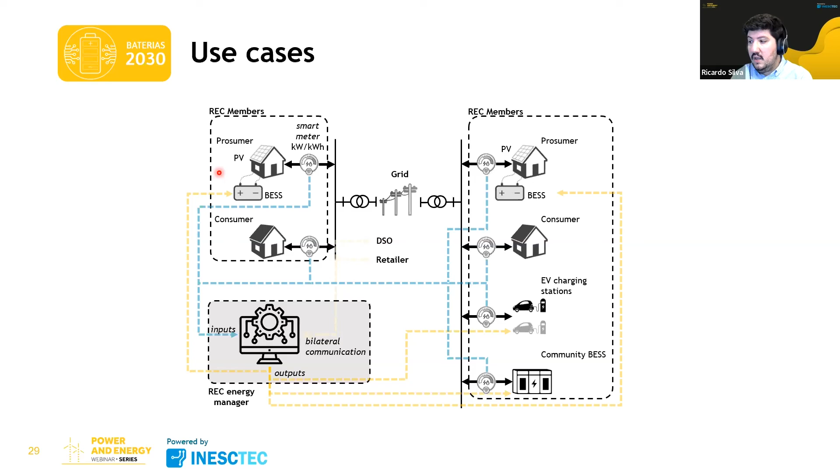Now, how do we tackle this? Our approach considers two stages: one where we optimize each prosumer individually, each member of the community with its own assets, and then a second stage where we do a community optimization.

But how do we guarantee that individual interests are taken into account? By introducing a restriction on the second stage that says your new cost found in the second stage of optimization cannot be worse than the one found in the previous one. And by defining that, we also include in the objective function of each individual member the possibility to trade energy in an internal market that needs to be linked to a cost.

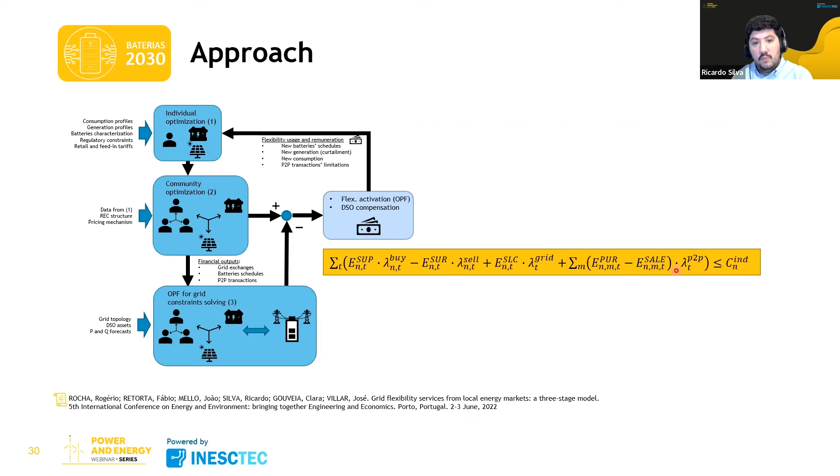I'm not getting into details on how this cost is found, but it's always better for someone to trade within the community than to trade with a retailer.

Some formulation here, I would suggest to pass to... yeah. Some results were shown there, but there will be live tests in Braga municipality, and I'm done.

Sorry for overlapping the time. Thank you, and Q&A time. Thank you, Ricardo. Thank you, Tiago.